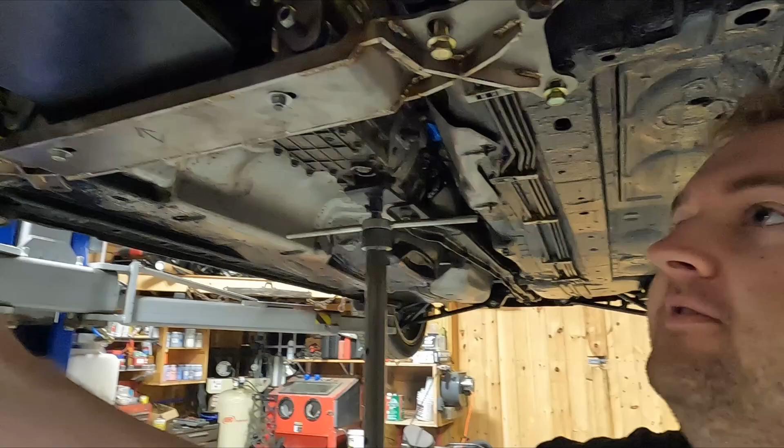Engine is in place. It's mostly fastened together, but we're not going to get rid of that yet until things are screwed together. The engine is where I want it, so we're going to lock it in place and then rescan the engine bay.

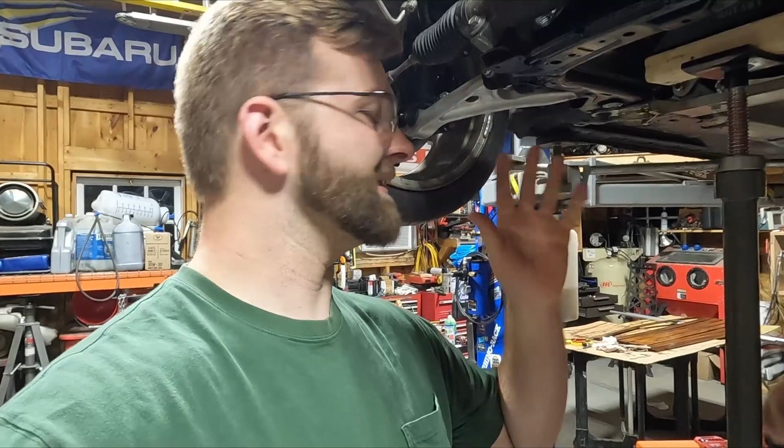Jake's got all the bolts, at least enough to hold it in for the time being. We have a couple length problems we have to deal with, so now we've been able to test fit the bolts and figure out what length we need. We'll be ordering some more bolts for the time being. The motor's held in and we're ready to take it down.

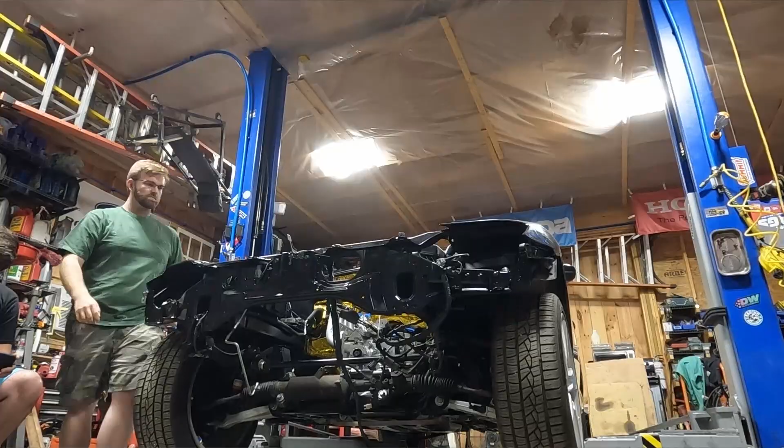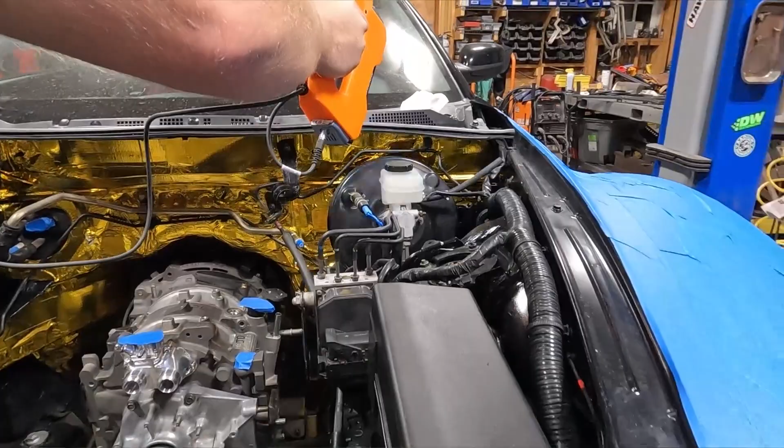Hey look, it stayed up there. So now that it's going to be down, Jake spent the last week relocating the engine and getting it ready to be rescanned. From the rescan of the engine bay, I'll be able to relocate everything into position in CAD, and now we'll be going on to our third iteration of the exhaust manifold for mounting the turbo.

As we get the car down and hold the turbo in, we'll talk a little bit more about how it'll be located and what orientation we want it in for optimizing space and tube length for the exhaust. So it's actually a new week to finish off where I left off a couple seconds ago.

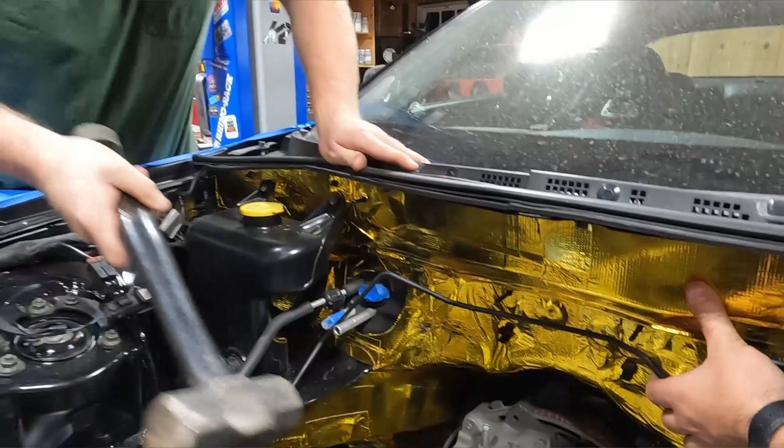We got the RX8 down, and since Jake relocated the motor, we actually ran into a new clearancing problem that was actually solved with a sledgehammer. Part of the firewall was getting in the way of the lower and upper air intake manifold, so I promptly took I think it was like a 5-pound sledge, and we popped the firewall out of our way.

With that squared away, I was able to scan the engine bay, and now we learned the new position of the engine, which shifts what we can fit for our turbo manifold coming off of the engine. And it's posing new problems and hurdles that we have to overcome.

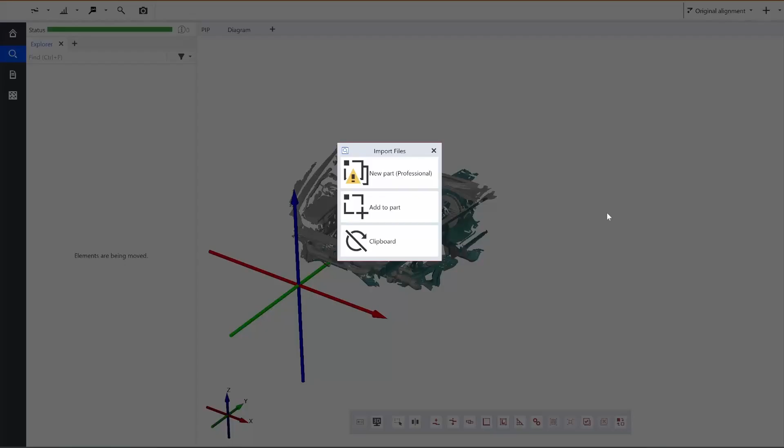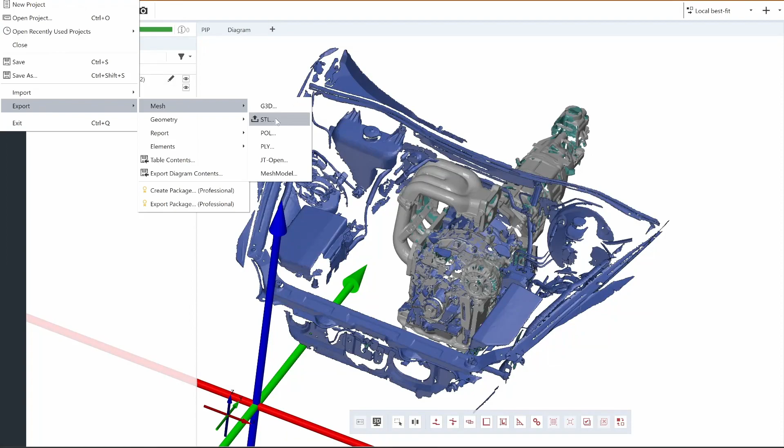Having the engine rescanned really meant I kind of had to start from scratch all over again, where my only reference point that I kept was the engine bay. But from that engine bay, I had to re-import everything into GOM Inspect. With GOM Inspect, I'm able to realign everything to the coordinate plane, so that way it is all lined up individually.

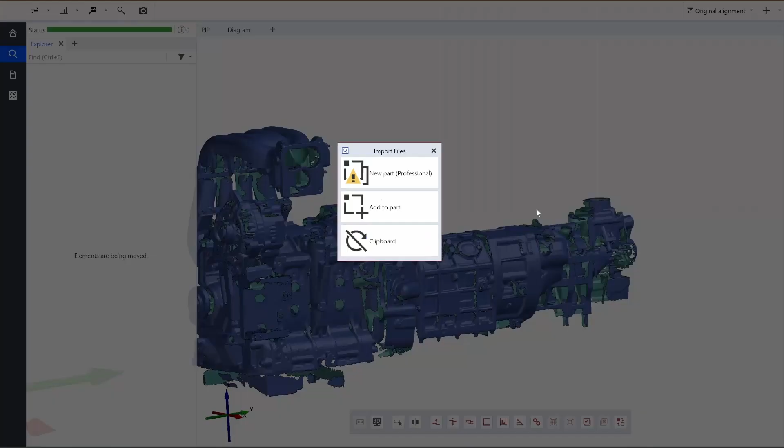Because with the scan, you don't just have a blanket scan that magically has the whole engine. We have to go through and scan the engine, the transmission, the upper and lower air intakes, the throttle bodies - everything gets scanned individually and then placed into a coordinate plane. Being placed in the coordinate plane is a lot harder than just dragging and dropping like it's a Word document. So this software GOM Inspect is really cool in that it has these alignment tools to bring it to the X, Y, and Z coordinate plane.

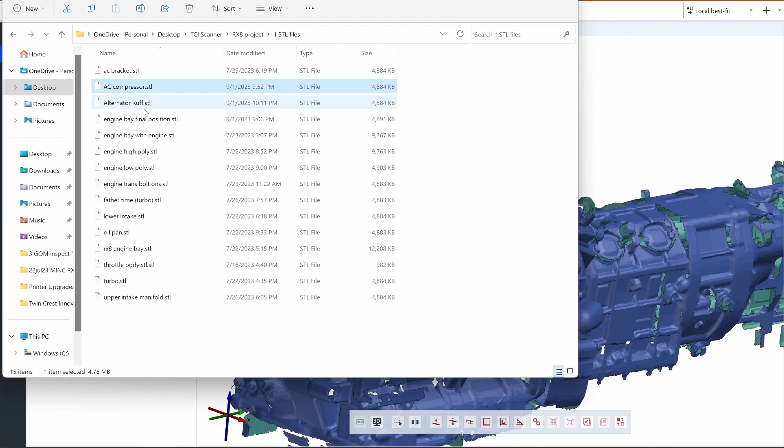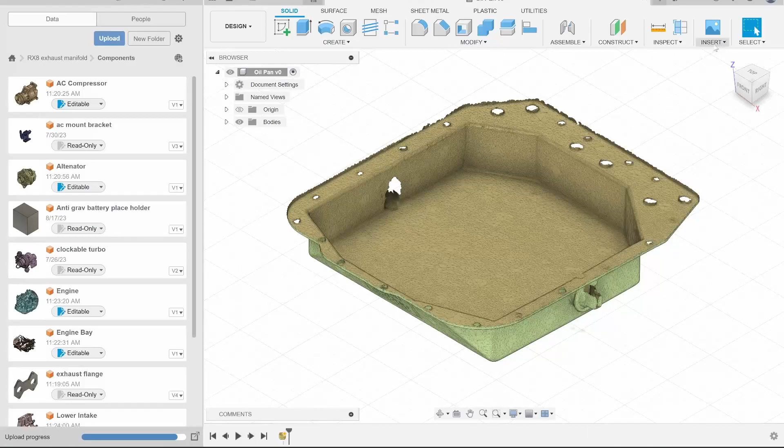With the engine sitting where it is now, we're facing a new problem of - or I guess the same problem of - where to put the turbo. The turbo fits in space all in that area, so we're not really concerned of if it fits or not. We know it fits. It's really just the where and the orientation that the turbo is going to have to sit, and that'll be the problem we overcome going forward.

I know I probably said earlier in this video that we'd talk more about it in this one, but a lot was going on this last month and we didn't get to it. We should be answering that really quickly in the next week.

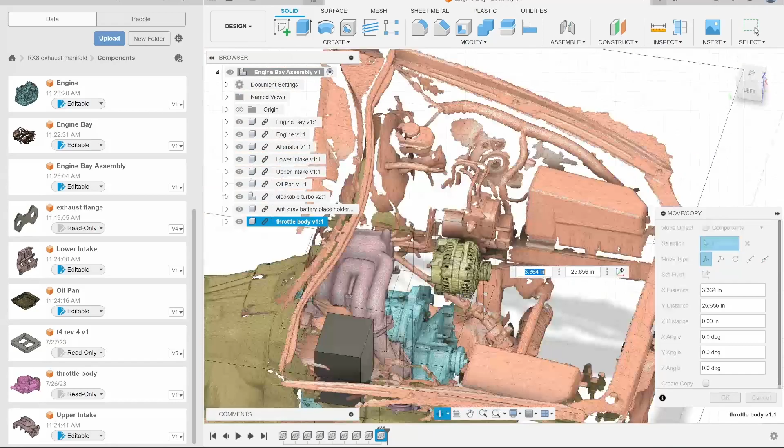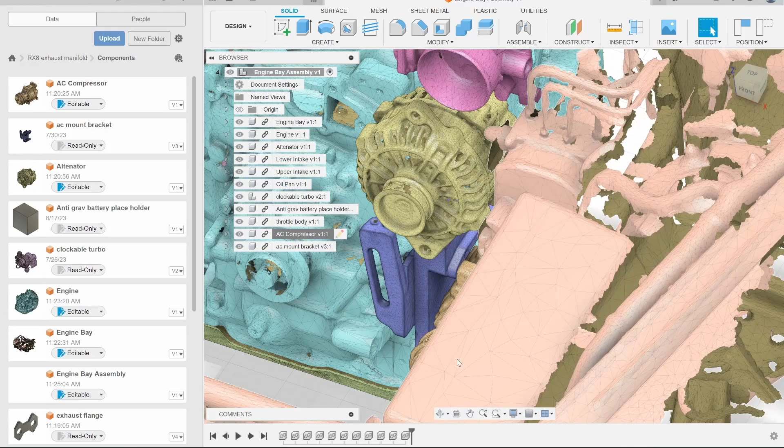You know, when you take on the 20-minute job that you think it's going to be easy peasy and over, then you come back 6 hours later and it's finally done - that's kind of what happened with all the stuff we had going on. But we're finally there, still making headway, always making movement in the correct direction. Sometimes a few steps back doesn't hurt, but we're getting to where we need to be.